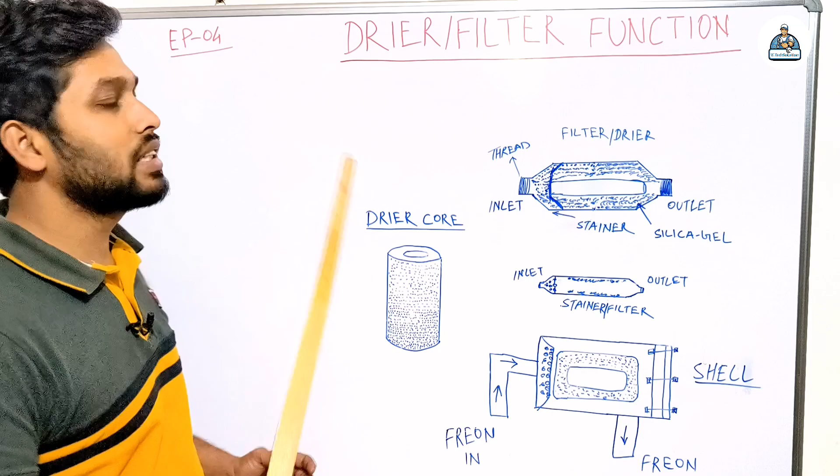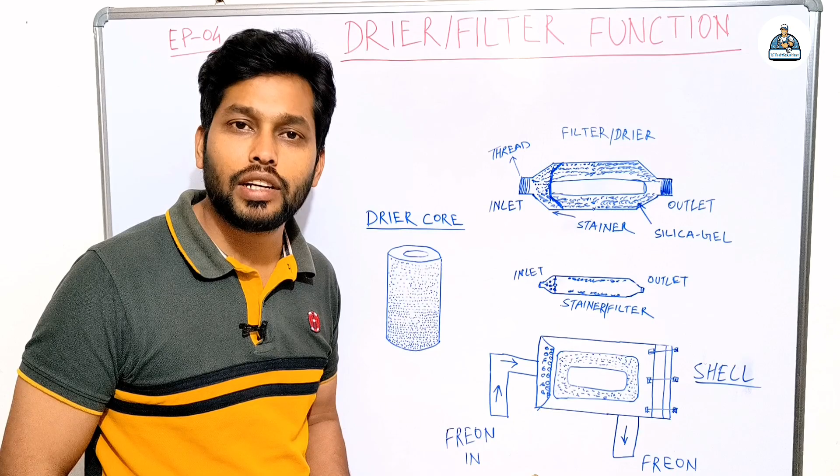This is the dryer filter. You can see the different types of dryer filter on this whiteboard. I can show you a picture of this type of dryer filter. So this is the dryer filter and its inside part looks like this.

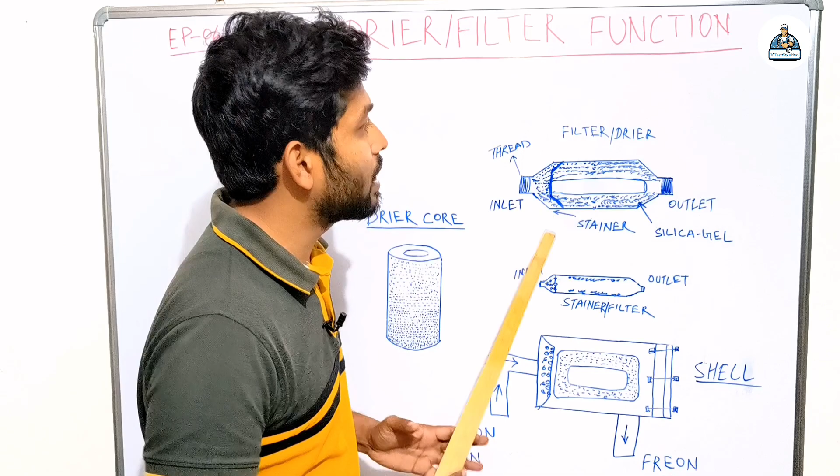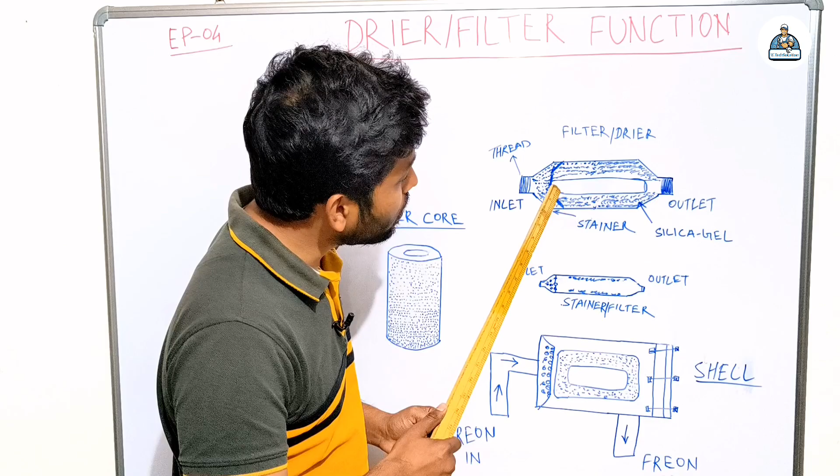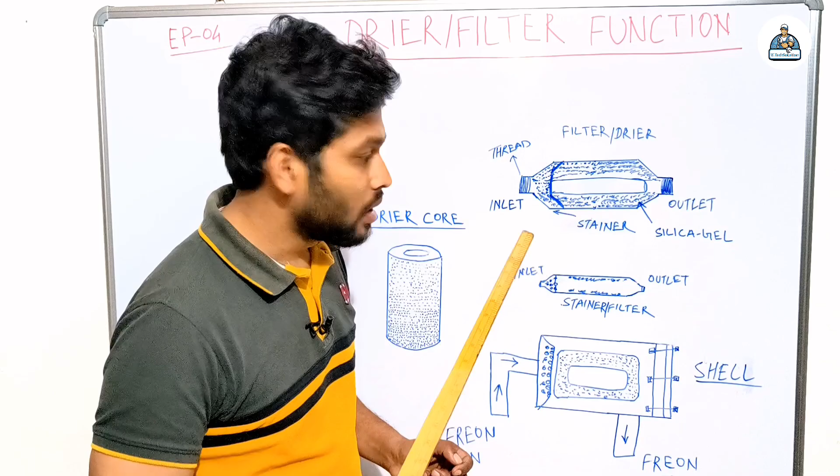From here, this is the inlet point and this is the outlet point. This is the thread type dryer filter. When freon enters from here, this is the strainer, so first it clears the freon and then it enters inside the dryer filter. Inside the dryer filter here is the silica gel point, small silica gel pieces. This is also called the dryer core, dry core parts.

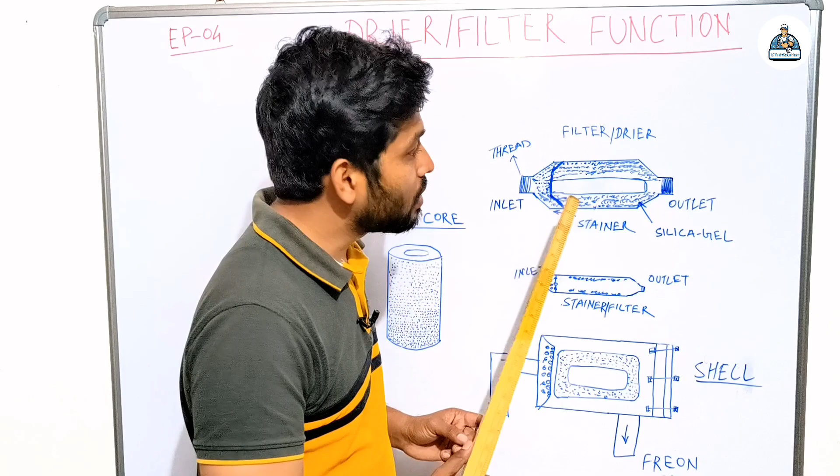When freon enters, the dryer filter's function is to absorb the moisture from the freon and then pass it out from here to the metering device. So this is the function of the dryer filter.

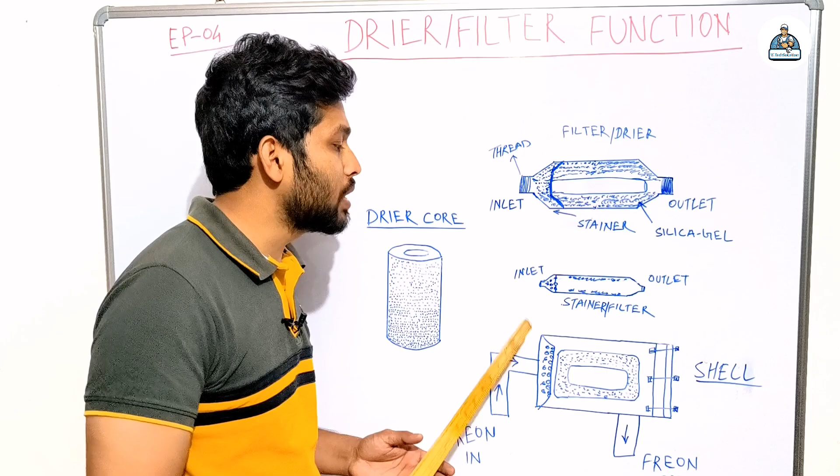Actually all dryer filters have the same function, but there are different types of dryer filter, and different units use different types. This dryer filter is used in small AC units, meaning mini split AC and window AC. This is the small type of strainer filter, the copper type. I can show you the picture so your concept can be clear.

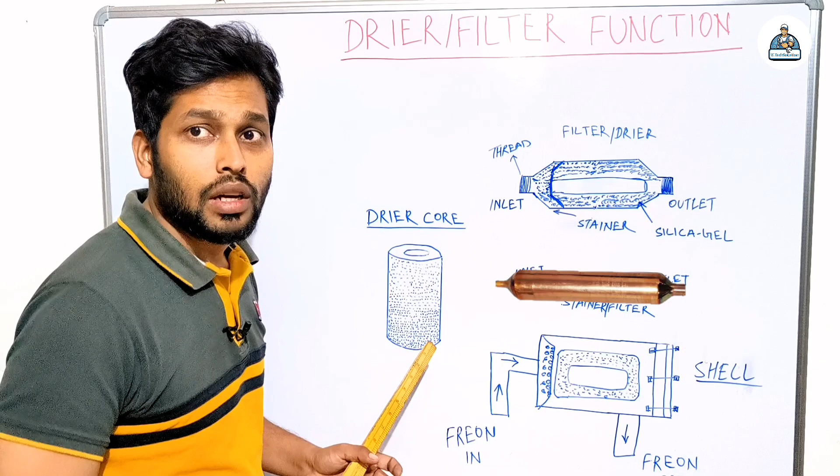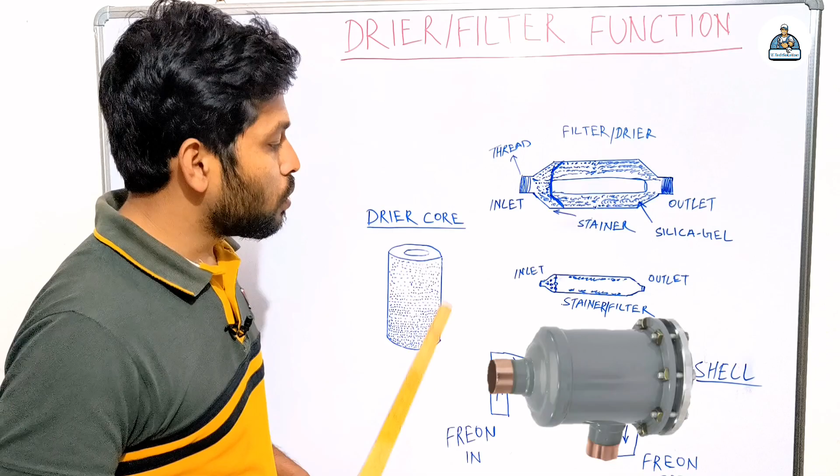This type of strainer filter is used in split AC and window AC. You can see here, this is a very big picture, so I can show it to you for your kind information so your concept can be clear.

You can see here, freon comes in from here and here is the strainer. Again this strainer is here, this one is the strainer. Freon enters from here, gets filtered here, and again enters inside the dryer filter.

Inside this shell type of dryer filter, there is the dryer core. This is called the dryer core and there is one hole inside it, so freon enters inside. What happens is the dryer core absorbs the moisture from the freon and it comes out from here and goes to the metering device and then the evaporator.

Now, what happens if our dryer filter is dirty? How do you know our dryer filter is dirty or choked up, so that we should replace it? This is the inlet point and this is the outlet point.

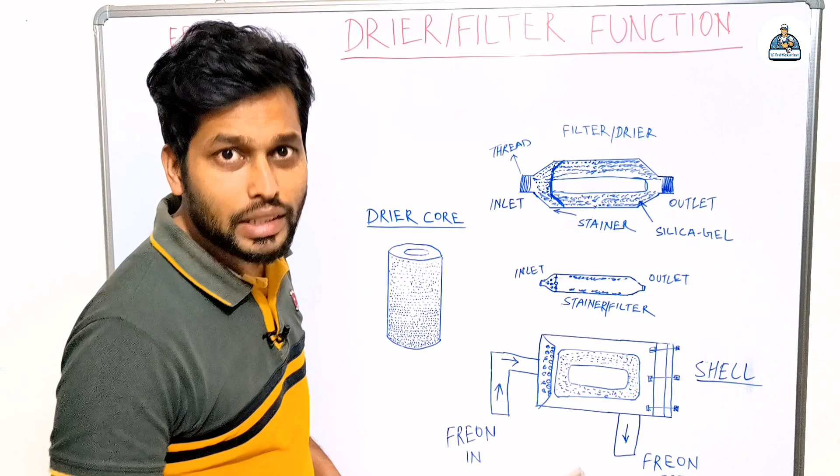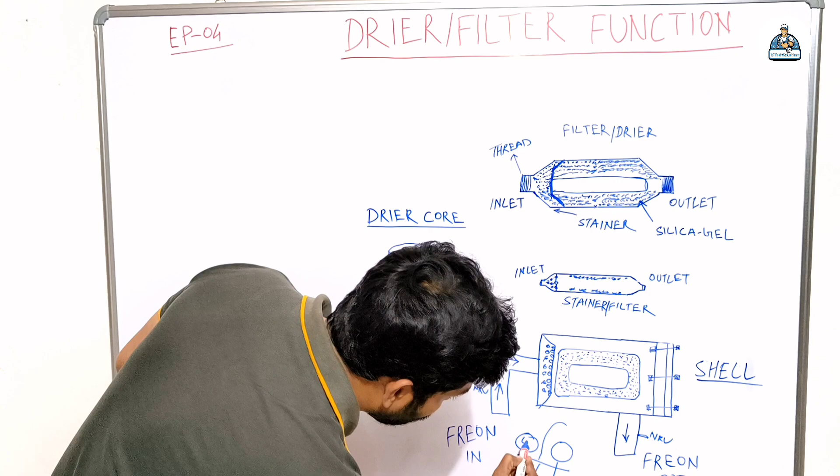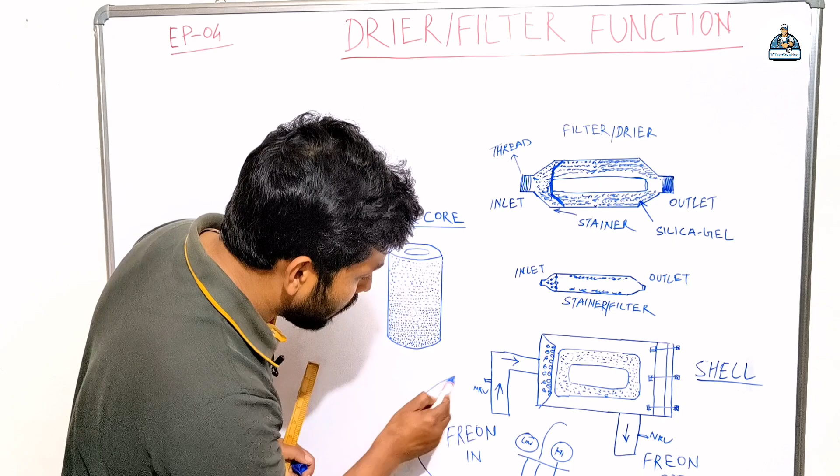Here is one charging point, and here is also one NRV, non-return valve. So we can install a pressure gauge here and check the pressure, one line here and one line here. We can take a dual pressure gauge, like this. This is for the cylinder, this one for the cylinder, this is for low pressure, this is for high pressure. This is the charging line, so one charging line we connect here and one charging line we connect here.

We will check the pressure. For example, if here the pressure is 270 psi, then here the pressure should also be 270 psi. If the pressure is the same, it means your dryer core is okay, your dryer strainer is completely okay, and in this situation you don't need to do anything.

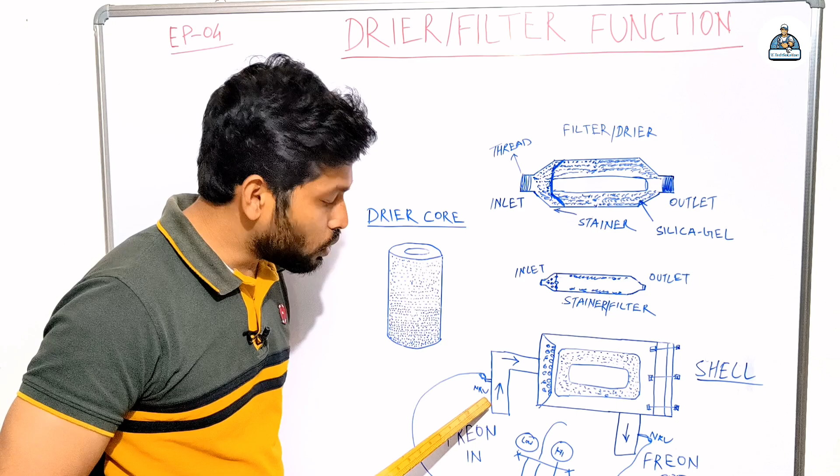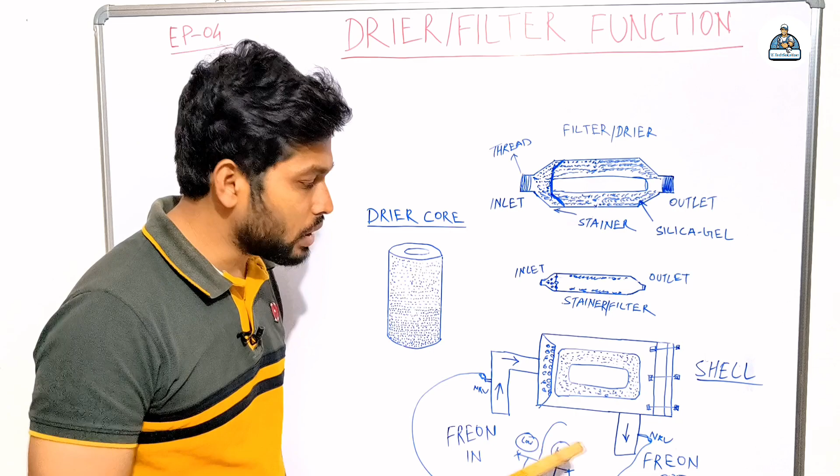For example, if the inlet point is 270 and here it's coming to 260 or 250, it means your dryer core or strainer is blocked at some point. So that is why it shows here 250 or 260 while here it shows 270 psi. It means your filter is blocked. So when the pressure is showing like this, 270 on one side and 250 on the other, it means you need to replace your dryer filter.

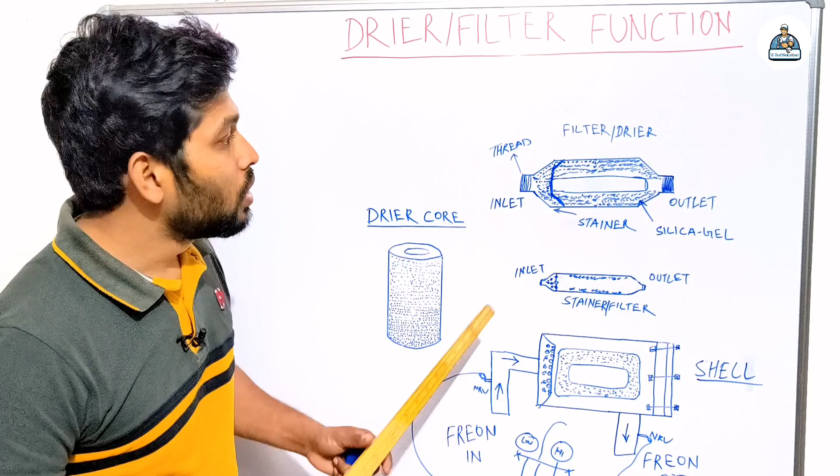So now you understand how to check if this dryer filter is dirty. Same function here, you can check if there is an NRV valve. Connect your pressure gauge to the NRV valve inlet and outlet points, and you can check.

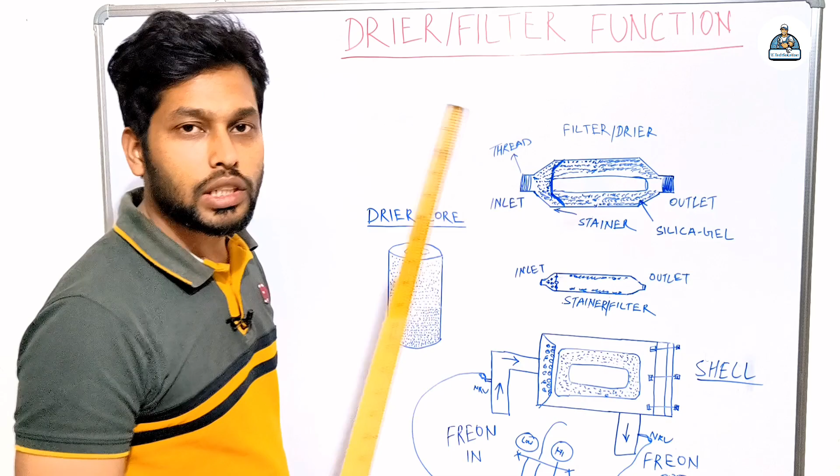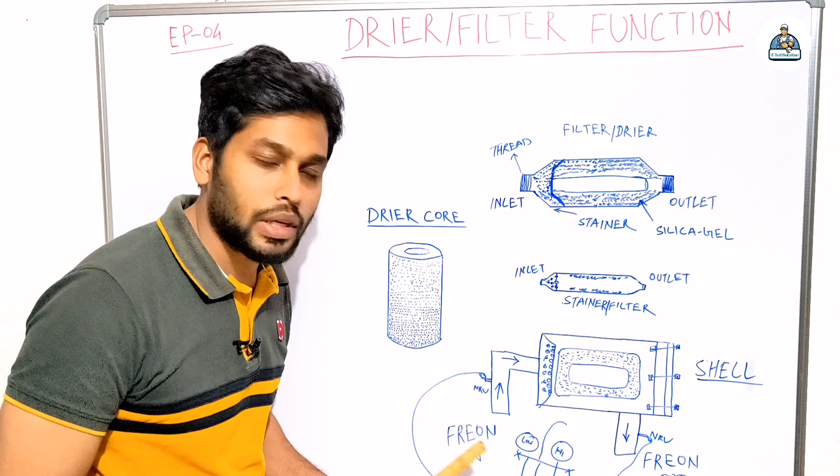If you don't have this gauge, you should have an infrared temperature gun. Take the temperature of the inlet point. For example, if the inlet point temperature is 40 degrees Celsius, then here it should also be around 40.5 or the same temperature. That means your dryer core is completely okay.

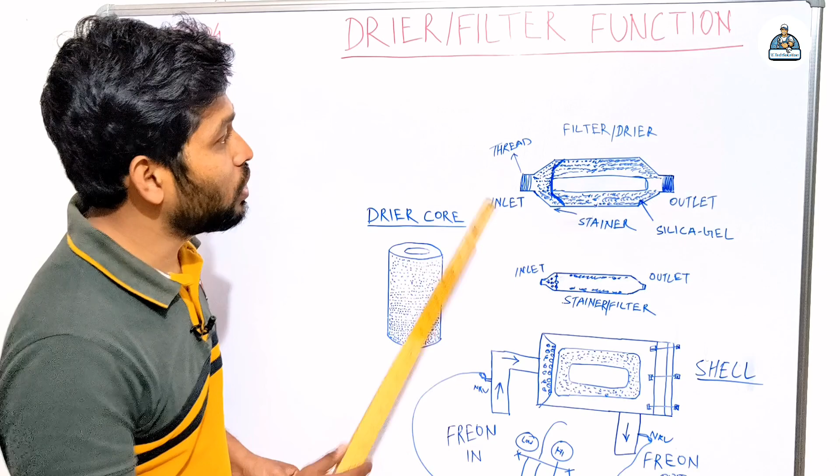So now you can understand how to check the dryer filter, and you understand the function of the dryer filter. This is called the dryer core, and I can show you a picture so your concept can be clear. This is the picture of the dryer core; its function is only to absorb the moisture from the freon. I hope your concept is clear now, and I hope you understand the function of the dryer filter and how to check if your dryer filter is dirty or not.